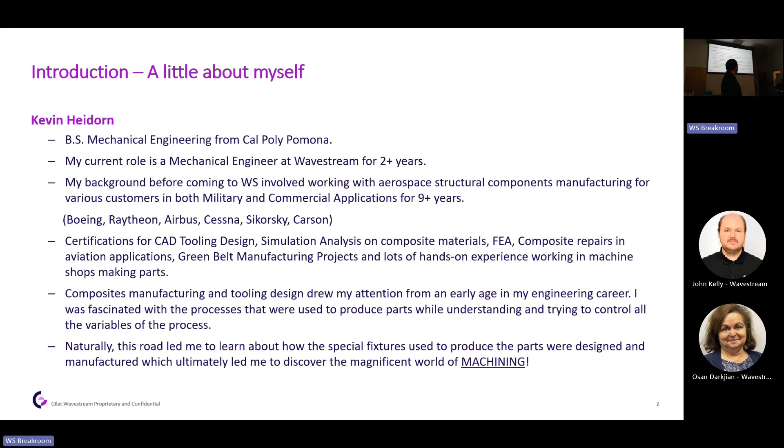So the agenda today - first off, I just want to cover some basic history and overview of how machining and things like this came to be, right? How did we get to this world we live in that is possible because of machining? So we'll go into some of that. We're going to talk about the different types of materials. I think having a basis for material science is really, really important in machining - it's really the alphabet. You need to know what materials will do, what they're made of, and how they interact with each other if you're going to have any hope of carving it into a nice, beautiful shape at the end, right?

So we're going to talk a little bit about that. We have some work holding types, and we'll talk about being creative problem solvers. When it comes to this, you have to use your brain a lot. You can't just Google some of these things, because no one's ever done it before. So you're constantly trying to figure out new and better ways to do it. We'll look at some options there.

We'll talk a little bit about fundamental shop equipment and what it takes, before you can even start machining, there's a lot of decisions and early steps before you can get to the fun stuff. So we'll talk about the tools used to get us there, and then we'll get into a little bit of depth on cutting tools.

Speeds and feeds is a really important topic. I know there was some interest in that, so I want to go over general guidelines on how to run machining. Then we're going to talk about manual versus automated machining, because they're two different branches entirely. And hopefully if we have time at the end, I want to get into some basic CNC programming for you guys, so you have an understanding of how it works, and maybe we can even do an example problem.

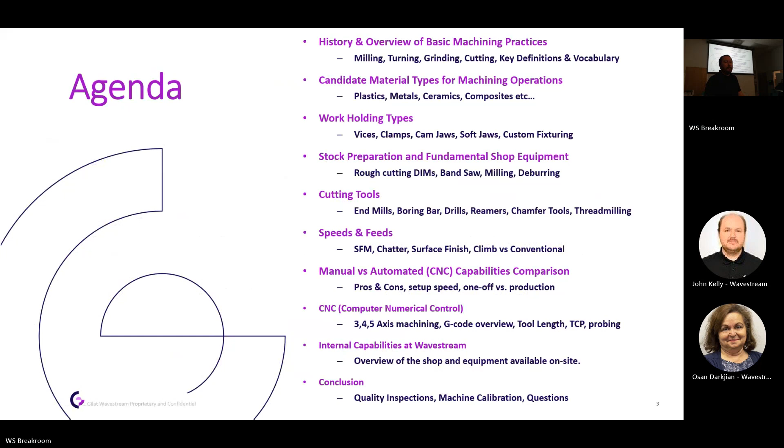So that's in there, and there's quite a lot of topics here. To finish it up, if we have time, I'll go through what our internal capabilities are here with our shop, so you can expect what to do if we need to do a job in-house. Then we'll have time for questions at the end, hopefully. So let's get started, definitely got a lot to cover today. Feel free to stop me along the way, but I'm just going to get going.

So, history of machining, right? If you think about this, we go all the way back to when we were in the caves. The cavemen were making rocks and arrows and things like that out of what they had laying around. Ultimately that really is machining. If you go back far enough, we're trying to use a tool to form something into a useful shape. There's actually been evidence of even other species, not even humans, that use tools. So this has been around for a long time.

I didn't really want to go into everything between 10,000 BC and the last 60 years, so I'm just going to jump ahead a little bit. There were some really important things that happened around 1870, when a lot of this stuff started happening - we'll talk about that later. If you look through this slide, what you'll see here is this is actually a turret lathe. These are some really old early machines, and a lot of this came about if you look at this time frame - we're in World War II right there.

War is always driven like big production on a big scale, and it's driven a lot of innovation. It's a sad and unfortunate thing that we have to deal with, but at the end, these are some positive outcomes from it.

If you zoom ahead here to the 1970s, this machine reminded me a lot of one that we actually had at our last company. It was called Big Blue, and we still used it in some production processes. It actually ran on something called ticker tape, which you'll see right here, which basically just has a bunch of holes in it.

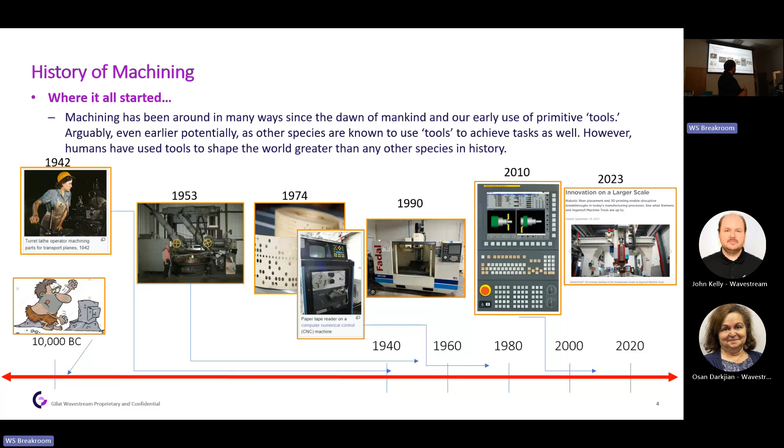I mean, they can be bigger than this whole room, all the way to the wall with the offices in the back. And they'll have a big gantry that will move. The amount of mass and precision that's moving on this stuff is just unbelievable. So hopefully we'll get into some of that.

So just to get started here, really, there's three things. I was trying to break this down. What are the three most important things when you're thinking about machining? For me, it really breaks down to hardness, heat management, and rigidity. These are the three biggest variables. Everything else matters, but if you're not able to work with these, you're not going to have anything that works in your process at the end.

So generally, going over hardness, I think I'm going to spend a little bit of time talking about hardness because it's such an important aspect. Everybody's familiar with hardness, they all hear this word, and I think you kind of have an intuitive sense for it as a kid. Even just like, oh, my nail can scratch this, or that scratched me, that hurt, right? So you get this idea pretty early on about hardness.

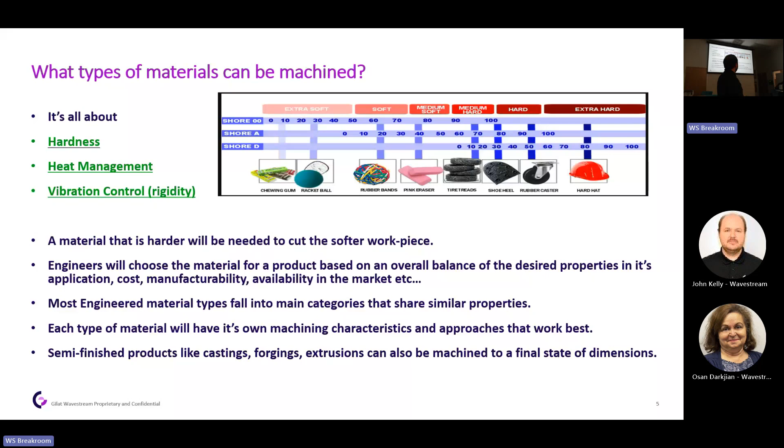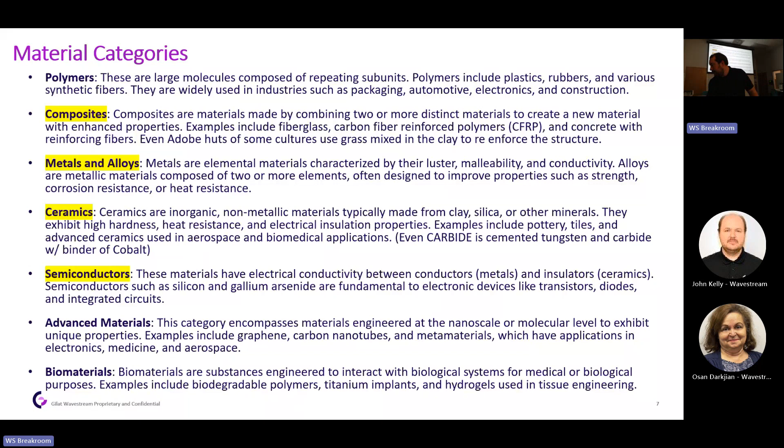You'll hear these words like Inconel, Hastelloy, Waspaloy, Nitronic—a really popular one—and, of course, titanium 6Al4V, which we actually have some pieces of here today. So this is a piece of titanium 6Al4V, and I'll go ahead and pass this around.

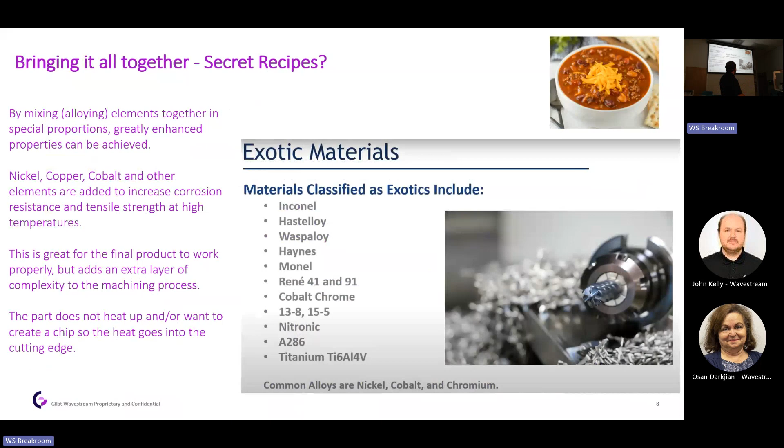Next, it's a machine part, and the machining that goes into something like that is definitely a bit different than what you would do with just standard aluminum. Really the reasoning is these materials do not like to hold any kind of heat—they're very heat resistant, so we use them in high temperature applications, for example inside of a jet turbine. These blades here are actually these really exotic materials, and they're actually a single crystal that's grown, because we can't afford to have any cracks between the crystal. Otherwise you'll have a fatigue failure, and then that turbine blade can shoot out.

And sometimes this happens, you'll hear about it in the news, sometimes they'll just shoot out or get a chip. These pieces generally have to be machined, but there's some really tricky operations that go into that. I'm kind of jumping ahead, I think I'll come back to these slides later if we have more questions, because this is the high end of machining. I just want to show you guys what's possible, and then we're going to go back to the basic stuff and how do we get here.

So let's move forward. We talked a little bit about hardness, and I also want to talk about this word called toughness. Both of these are really important to understand. Everybody generally has an intuitive feel for hardness, but toughness is a little different. Toughness is generally how well a material can absorb energy, that's probably the best way to put it. If you think about dropping a piece of aluminum on the ground, it may kind of bend, the surface will deform, but generally it's going to take all that energy pretty well. It's going to spring back.

When you have a material that's really, really hard, it's very brittle and basically not very tough. If we could have a perfect material, it would be diamond hard and super tough, and it would give you a lot of flexibility to push on it hard without snapping it, without creating these ultimate failures. Unfortunately, we haven't discovered that secret recipe yet, but we've got some really good mixes that get us pretty close and balance these properties out.

When you're comparing these things, they are different, but they're somewhat related, so just keep that in mind. Probably the easiest way to remember this is carbide is going to be really, really hard, but very brittle. And something like high-speed steel, HSS, it's not going to be as hard as carbide, which we saw on that Mohs scale, but it will absorb a lot more impact. So you can actually be a little bit tougher on those cutting tools, and they're not going to just explode in your face. They're going to take it, they're going to bend and give a little bit more.

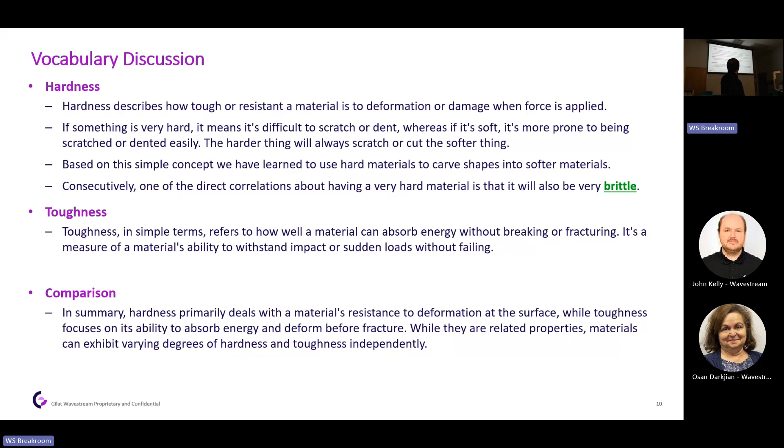Hopefully that gives you a little bit of understanding there of when we're talking about those words. So some additional vocabulary: MRR, this is a short acronym for material removal rate. It basically has to do with, if you have a cutting edge, how much volume you're removing and how fast you're removing it. It's kind of like guys talk about their cars, like I got 700 horsepower in my Hellcat, right, that's a bragging thing.

You have MRR, if you can get a big MRR rate out of a machine, that takes horsepower actually at the spindle, but it also takes this combination of axial depth of cut, which is how deep you're cutting, and your radial depth of cut, which is over from the center line. You can even take a full radial depth of cut and a full axial depth of cut at full horsepower spindle, and that's how you would calculate that MRR. I know there's going to be some math here, so if you're not comfortable with that, just come to me later, and hopefully we can get a good intuitive base for you. I will get into some more math later on, so don't be afraid, it's all good, it's all important.

Surface feet per minute, this is SFM, you'll see this a lot as well. This is very important in terms of how to derive a speed, an RPM on these cutters. How fast you're spinning it is directly related, and you'll see that in RPM, which is revs per minute. Everybody sees RPM on their car, so again, how fast is that engine turning? That's going to be a really critical parameter that we're interested in.

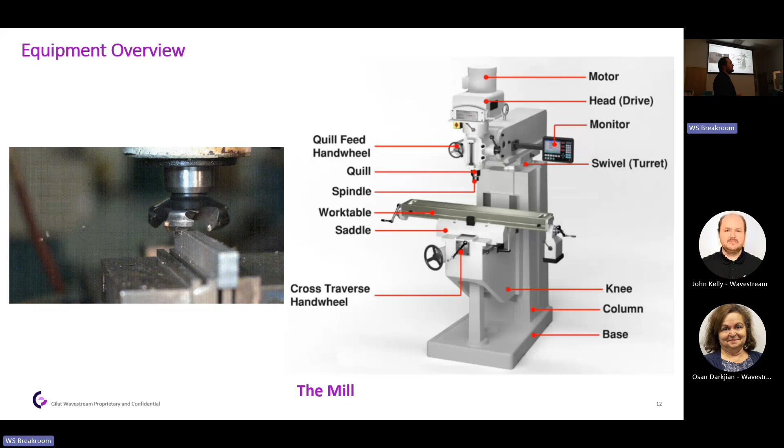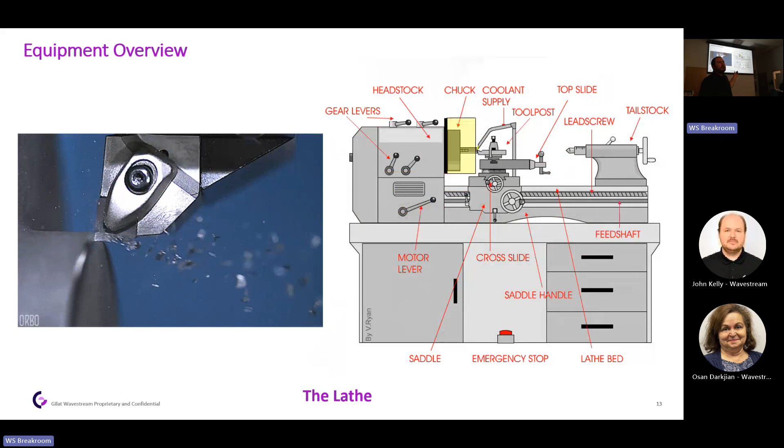And so all these pieces here are how you would adjust this. Again, you have this piece here, which will actually slide back and forth on a lead screw. And then these handles here adjust your gear ratio. There's actually a huge transmission in this thing with a bunch of really intermeshing gears. And you can actually adjust the speed of what this thing is turning at by playing with A, B, C, and 1, 2, 3 on these levers. We're going to talk more about why we do that, but ultimately, it's to set the RPM at what we want for that given material.

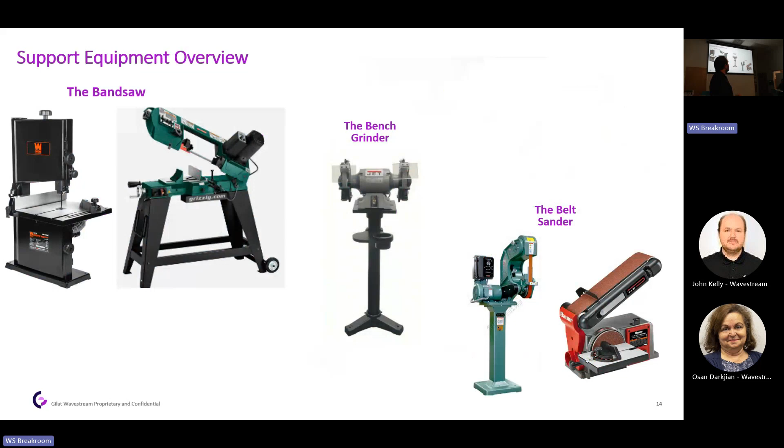So we have a really sharp band here, and what we'll do is feed a material into it. This one actually is hydraulically operated, so it'll come down and you can set how fast it drops down, so you don't have to worry about pushing the material through. You just basically set it on there, and it'll slowly drop on its own, which is really nice. Then up here we have the bench grinder, which has some cutting wheels, usually made of some type of stone. And then over here we have the belt sander. All three of these are really important in prepping that stock before we can really get started in machining.

So I figured that was helpful to put in there. And really, the bandsaw is made for just making that first cut.

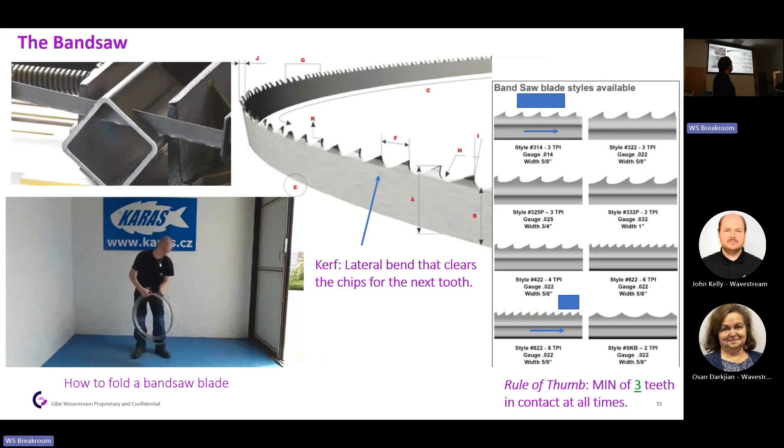Generally the rule of thumb is you always want to have 3 teeth in contact with the material at any time, just to spread the cutting forces out evenly. If you try to cut a small piece with a blade meant for bigger material, you're going to end up breaking the teeth off, because one tooth has to do all the cutting as it goes through, and then the next one has to do all the cutting, and it's not sharing. What we really want is at least 3 teeth in contact as it's pulling through the material. So keep that in mind if you're ever using a bandsaw and wondering if it's the right blade. That's a good rule of thumb.

You can also do this with titanium, which I've done, and the sparks actually come off white. It's very cool, kind of like if you go to the golf range at night and someone's got a titanium driver and they hit the ball, you'll see a little white spark shoot off. If you guys want to see some sparks, we have that piece of titanium floating around, we can grind it later.

Magnesium is a bad idea too, don't do that, because you get that auto-ignition temperature and it turns into like a 5,000-degree meltdown and you burn a hole in the earth. So don't do that.

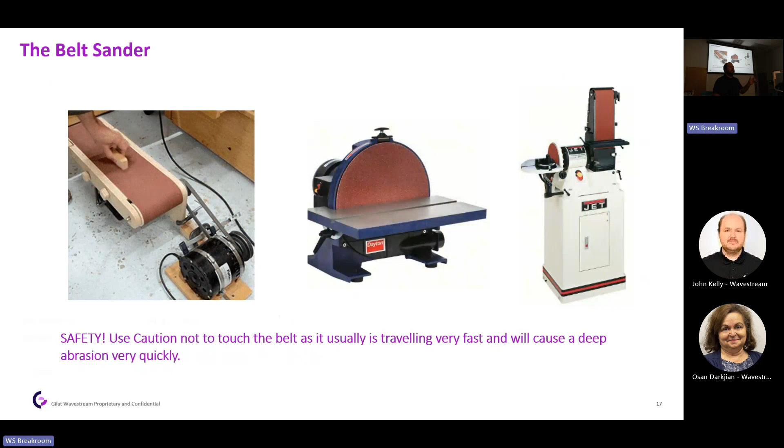Once it's ready, it's going to drop into a fixture. This is probably one of the more important things to really understand, if you take anything from today. It's not tricky.

It's just something that'll change the way you think about the world, I think. At least it did for me.

We all know we live in a world with 6 degrees of freedom. We can walk forward, back, left, right, or jump up and down, but any movement has to be some translational movement in X, Y, and Z, and you can also rotate about X, Y, and Z. So you have 3 translations and 3 rotations, which gives you 6 degrees of freedom. Anytime we're locking a part into a fixture, we want to control all 6 degrees of freedom.

The easy way to think about it: say I've got this part I want to lock down. If I take 3 points anywhere on it, I can create a plane, and that locks down 3 or 4 of the degrees of freedom right off the bat. But we'll still be able to rotate and translate on a couple. So by adding in 2 pins here, you can stop that movement and stop the rotation. Then the last thing you have to do is move it up to 1 more point.

Now if this part is in contact with 3 points to make a plane, 2 points for a pin, and 1 point there for the point, you're actually going to lock down all 6 degrees of freedom, and then you're going to be able to machine it.

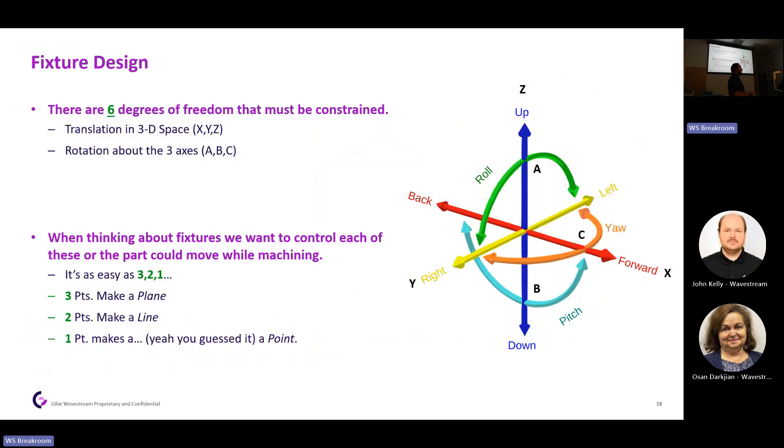Yeah, go ahead, you have a question? Can you machine without locking all 6 degrees of freedom?

You can, but it's probably going to move on you, so it's a risk. In some cases, like on a lathe, we're not quite locking down that rotational degree because we have to turn the part, but in the chuck, yeah, it's locked in there. So it's kind of relative between the workpiece and the holder it's in - that's where those 6 degrees start to apply. But again, here you have a plane, we're creating a line across here with 2 points of contact, and then we have this last point of contact. That'll keep your part nice and fixed.

These are some overall calculations, and I'm not going to go through all the detail, but just to give you a rough idea: if you're using a 3 horsepower spindle, which is very common with a Bridgeport machine, and about 75% efficiency because you'll have some loss through the transmission and belts, then there's a conversion factor here and this is our surface feet per minute.

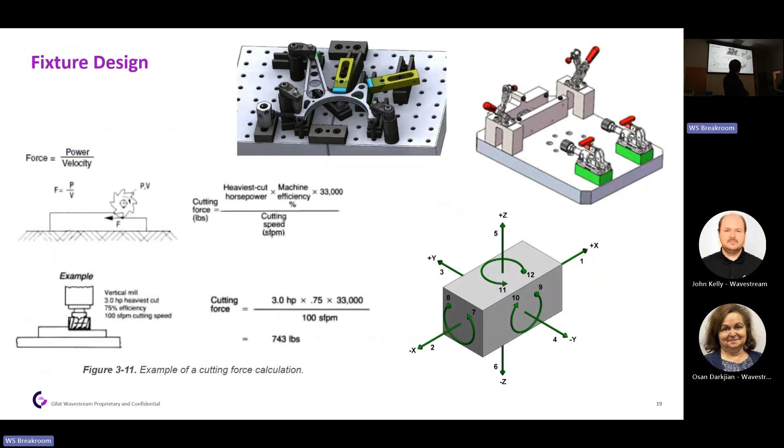It ends up working out to about 740 pounds that we need to react out of holding onto this part. So it can be a lot of force - more than you would think. I mean, 740 pounds just to hold onto a little thing that you're taking a cut with. So just to give you an idea of where that's at.

So these are some fixtures here - hold on tight, we get into work holding. This is actually one of my old SolidWorks fixtures. I designed this part back when I got out of college, doing some mountain bike parts, so I had to put the picture in there. We have a chuck, which is made for holding onto round stock.

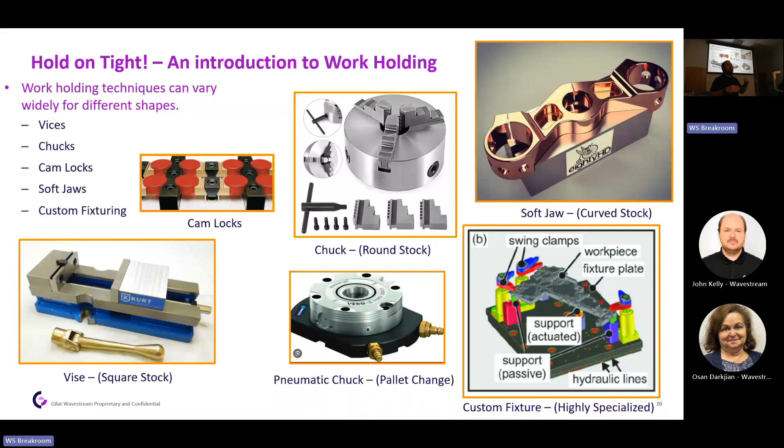Really the most popular one here is going to be your vise. You're going to take a block and fix it in there, and you'll use parallels to set it up and make sure it's nice and tight and level. And the fancy stuff gets into these pneumatic chucks and custom fixtures, which will have hydraulic pieces that'll move out of the way of the cutter as it's coming through.

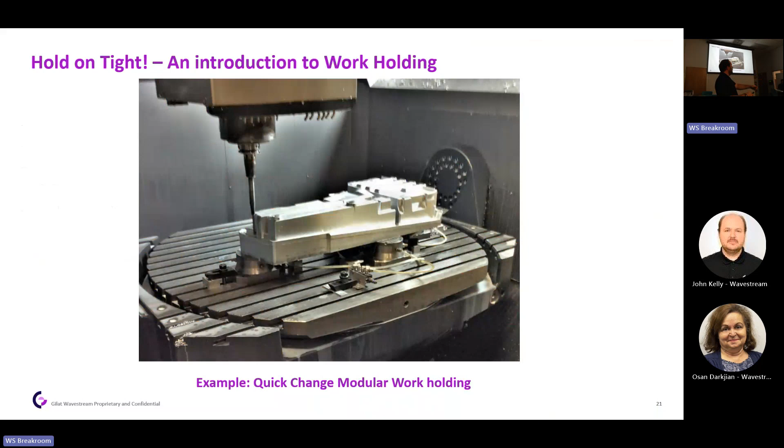So again, here's a picture of that. This piece is actually made to come right off of these pneumatic chucks. This is a quick change pallet system. So if you're doing a bunch of these parts, you can put some holes in the bottom, drop it in, machine it, and pull it right back out. So, some faster ways to do the same thing.

Let's talk a little bit about tool holding. So tool holding is stuff like this right here. This is a Cat 40 tool holder, and I'm going to go ahead and pass this around again. The drill's a little sharp, but if you hold it by this end, it's a nice end, so it's not gonna hurt you. But yeah, it's got a little weight to it. Feel free if you guys want to check it out.

This is all about tapers, right? So we have a spindle taper that is going to pull that tool holder up inside of it. And each one of these you'll see has a slight taper to it somewhere.

We also have the R8 collet. This is what we use in our shop here. It's really popular in a lot of manual milling machines, and again, that taper is right here. This has a drawbar that'll come down, feed, and pull this whole piece up into a taper. And then while it does that, it squeezes down and grips onto the end mill, or the drill, or whatever we're going to be cutting. So you guys check that out.

And then the HSK tapers, those are generally used in really high speed routing machines. You'll see those more common in composites, and really probably across the street they might even have some of that stuff, where they're doing wood and that kind of material.

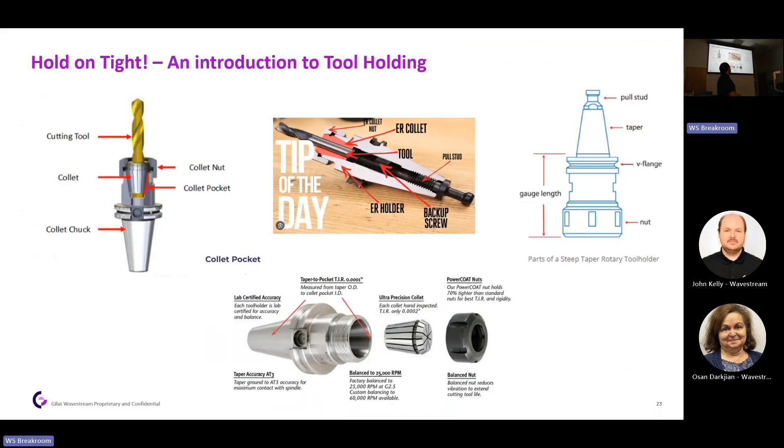So again, this is what they look like inside. You're going to have really three pieces. You have your tool holder itself, which has the taper. We have the collet, which is a really precise piece, and I have one of these that I'll definitely pass around. So this is the collet, and the actual drill or end mill will go in here. This is basically just a big spring, and again, it'll squeeze down as we tighten it up. This is a beautiful part. Look at it as you're holding it and figure out how do you make something like that. It's just one small piece of kind of getting this whole machining thing to work. We have to have these little tools to get to the end, right? And then this is just a nut that goes on and holds everything together.

So any questions so far? Are we still hanging in? Cool. Yeah. Yes, exactly. Yeah, a Dremel tool also has a collet at the end of it.

So I did a little bit of research and I actually learned some new stuff preparing for this. I thought I'd share because the statistics were pretty wild. If you look at something like, say we're holding these tools in the spindle, you see that drill over there. If that drill is not exactly concentric to the center line of the spindle - it's probably more common with an end mill - just imagine for a second that you don't have it exactly on center. And little secret, you never have it exactly on center. There's always going to be some amount of run out. It only takes a very small amount of run out to actually create a huge amount of tool wear. I mean, we're talking 1/10,000th of an inch can drop 10% of your tool life, which is pretty wild.

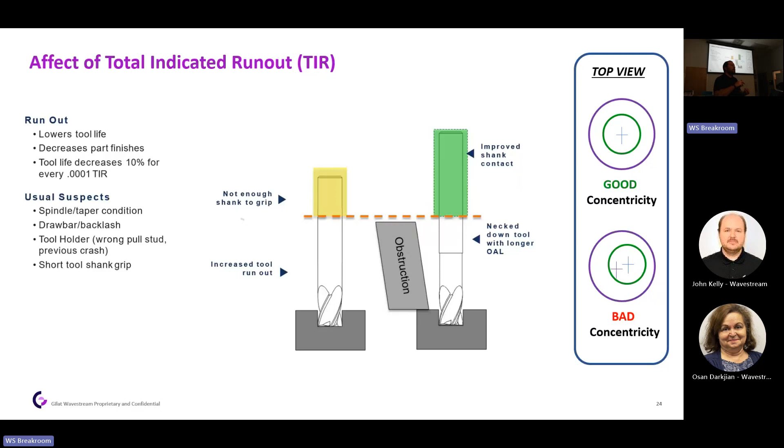So again, this is a top view of what that concentricity would look like. This is your cutter not on position, right? So this would be bad. So what we're looking for in these tool holders is we really want to maintain that concentricity. That's really, really important.

And then, after you've locked that tool into the tool holder, that tool holder itself has to go into the spindle, and it also needs to be concentric, right? So you have a lot of things that start to add up. And again, if you're not seeing a good result or you're seeing a lot of tool wear, you might have a problem with something like this.

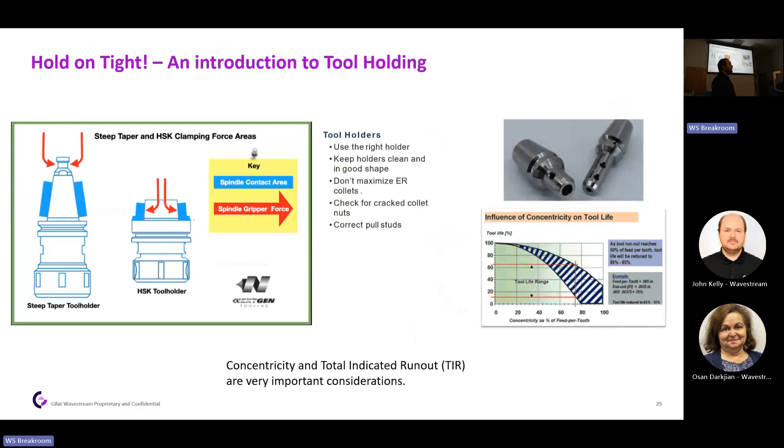So this is a nice little chart here. Check it out later. There's a lot of information in this.

So let's talk about drills. I love drills. Drills are awesome. Who doesn't like drills, right? Let's make some holes. It's the best.

Everybody's probably got one of these. Maybe you got one of these in your garage. This is a drill press. This is just a handheld drill. Again, this is using a drill in a lathe. So we're turning the workpiece, and the drill actually stays still this time, which is kind of cool. And then this would be in that drill press, where the drill's going to spin.

Drills are easily the fastest way to just remove material. We go back to that MRR, right? We want a material removal rate. If you want to get rid of stuff and delete it, drill it. Just drill it out, drill a bunch of holes in it, and it's gone faster than any other way. So they're a really useful tool in the shop.

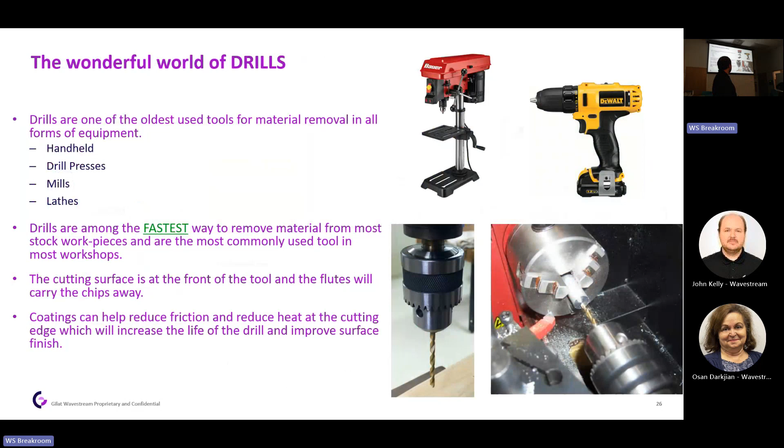And generally, the cutting surface is only going to be on that very, very front tip. It's called the chisel edge. And I got some pictures of that. Also, coatings can help reduce the wear on the tools.

So the first twist drill was patented by this guy named Stephen Morse. He actually also has a taper named after him, the Morse taper. He's a pretty important guy. This was back in 1863, and he went ahead and came up with this idea: hey, if we start cutting our metal out this way and drilling holes, that's pretty cool. We can drill holes in anything.

As time moved forward, the first thing we really started playing around with was higher carbon steels. We started learning about the Bessemer process and a lot of these iron-carbon phase diagrams, and engineers are starting to figure out this stuff that blacksmiths have known since the 1500s. So we start adding more carbon, they get harder and harder. Then we start adding cobalt, they get even harder. And then we discover carbides and solid carbides. And nowadays we've got these beautiful carbide tools that are coated.

The coatings can be anywhere from like a black oxide. This titanium nitride is really popular, you'll see that gold color. That actually reduces the friction while it's cutting, and also reduces heat in the tool to keep that drill lasting a bit longer. Then you have diamond, which is very, very expensive. Everybody knows diamonds are expensive, it's no different in the tooling world. These are generally lab-created diamonds, but they still cost a lot of money.

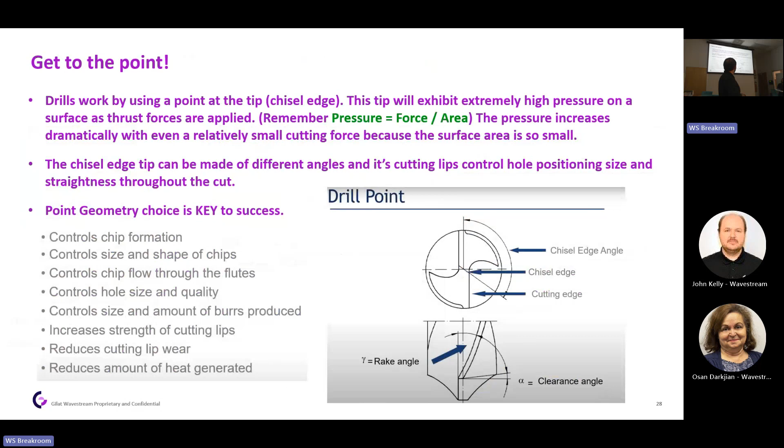So again, the chip formation is really important, and these all kind of add up to get you a good drill. But one thing that I actually kind of rediscovered was how important the difference is between a standard point and a split point drill. And they look about the same, right? But what's really interesting is this one is actually far inferior.

So this split point is way, way, way better. By using a split point drill, just with that small geometry change, you can actually reduce the cutting force by about 40%, which is really awesome. It's easier on everything, it's easier on the machine, it's going to be faster, and you can kind of go through.

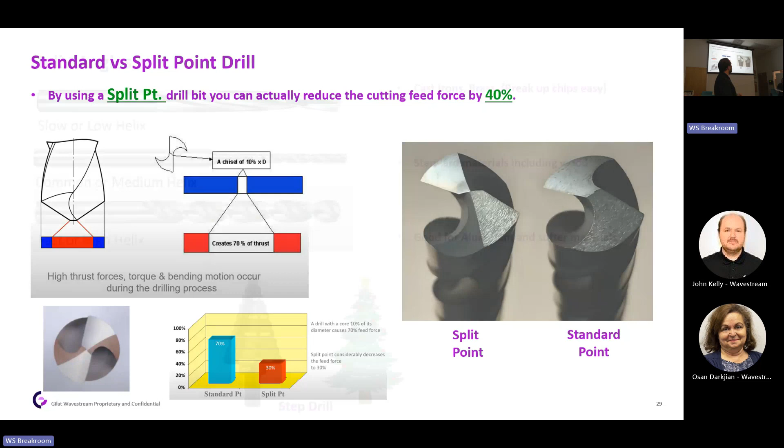So again, just that small geometry change there makes a huge difference in the way the drill functions. These are some other drills. These are showing the helix angles, and you'll see different rates here.

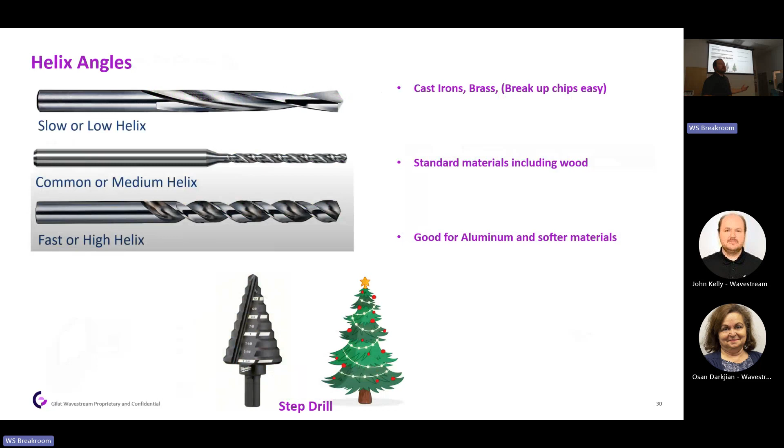I also have some of these that I'll pass around. And then this is a step drill. This is a really nice piece to have in the toolbox. It's like 10 drills in one. If you want to drill a bigger hole, you just keep pushing up a little bigger, keep pushing through. It always reminds me of a Christmas tree, so I just put that in there too. But basically you start small and work your way up, and then you don't have to keep a bunch of drills - you just have the one step drill. So it's good to have for field repairs, things like that.

To peck or not to peck - this is a question that everybody loves to fight about. Pecking is, when you start diving into a material, do you want to pull it back out and clear the chips out and then come back in, or do you want to just go through all the way? Depending on your style, generally pecking is not really the right way to do it.

That's if you have a hole that's about 5D deep, so 5D is 5 diameter. So whatever diameter hole you're cutting, if the depth of it is less than 5 times that, then you probably don't want to be pecking, because the drill has to keep entering the material, and it starts to wear out the drill bit. Now you've got 5 or 6 pecks on one hole, versus just that first one when it goes right through.

And so that's something to keep in mind. But once you start getting really, really deep in there, and you have a really deep hole, you've got to start pulling those chips out, so then you can start doing those retractions. That's just something to keep in mind there, Woody Woodpecker.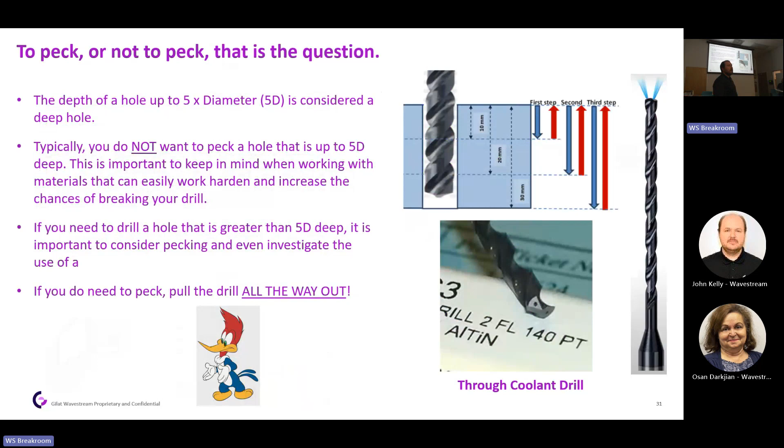And then sometimes you'll actually see these drills with through coolants. The spindle will actually allow coolant to flow through, and it'll come out here and help push the chips back out. So I have one of those - I'll pass that around as well.

Spot drilling. So this is kind of the right way to drill a hole if you want it to be accurate - you can do a spot drill first. And there's definitely a right and a wrong way to do a spot drill. The biggest thing is you don't want these edges of the drill to contact and catch first. So this is improper, right? We have too much spot angle on this.

What you want to hit is actually the center point, right? This is where all the cutting's happening. And so if this happens first, you have that come into the material - it'll actually help center up the hole, and then it'll give the tool something to really grab into. So that's just something to keep in mind there if you ever have to use a spot drill.

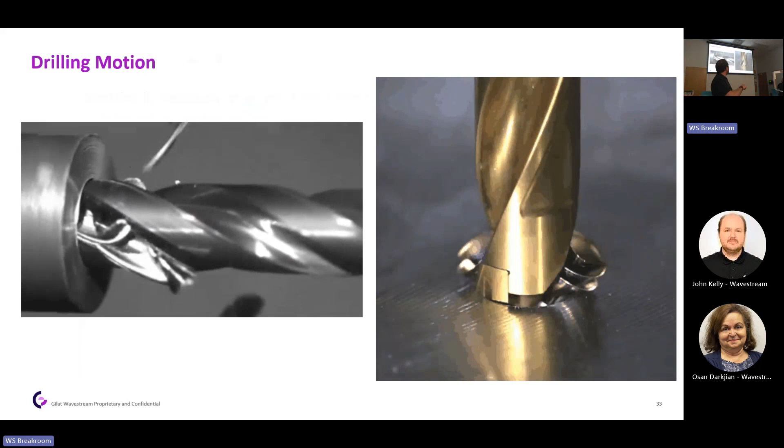Yes, we have a question - do they, does center punching work as a good tool? Like, to punch it first, it's very effective - it's kind of like a cheap spot, right? They actually sell a drill that's a spot drill and has that angle in it, but if you don't have one and you just want to punch it, yeah, definitely - because you want that center to have something to set up into. As long as the edges of the drill don't catch first, that's the biggest thing, so just keep that in mind.

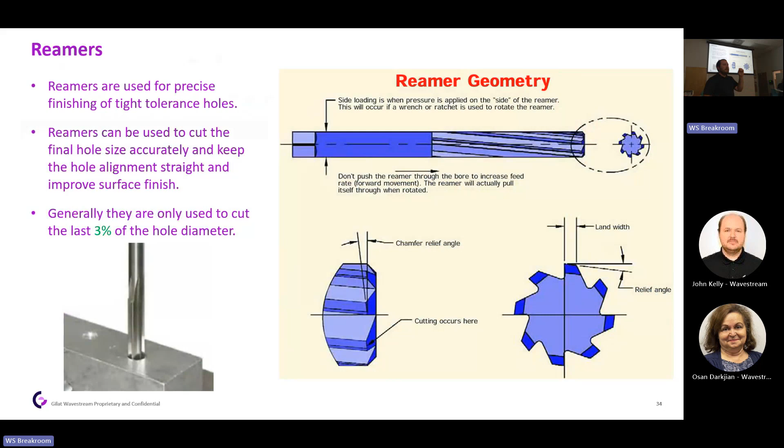Don't punch it too deep. But yeah, reamers themselves, they're really good at finishing - getting the hole the right size and keeping it straight. So I have some reamers as well. And these are all the different shapes - these are end mills.

So let's get out of drills for a little bit. We'll move into end mills. End mills are kind of similar, except instead of cutting on the face, they cut on the end, right? They cut on the side. That's why they call them end mills. And you can have a ton of different shapes with this. You'll see the coatings and those carbide materials, all that stuff still applies, but now we're in the end mill world.

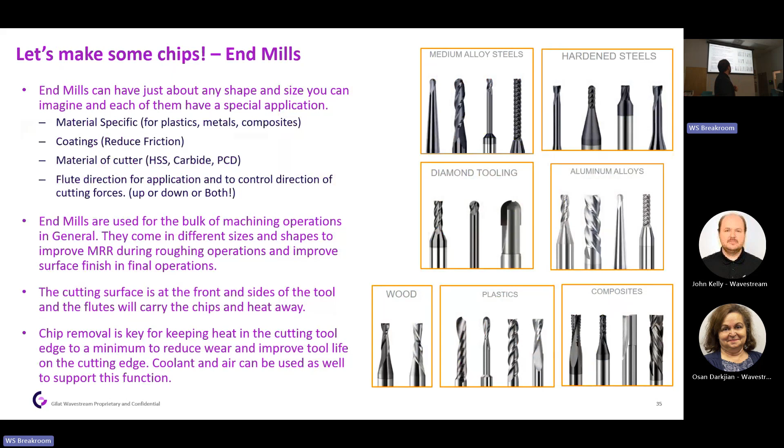What you'll really see is, like, aluminum stuff you're going to see usually has less chip, or less flutes. That's the number of these spirals that go up the side, and that's to get more chip clearance. If you're cutting wood, these are kind of interesting. Plastics actually just have one flute, which is kind of a weird shape right here, but it's just to get that chip clearance maximized. And wood actually has the flutes reversed. They're going the other direction, and they're meant to push the chips down rather than pull them out. So all of this has its own place and purpose.

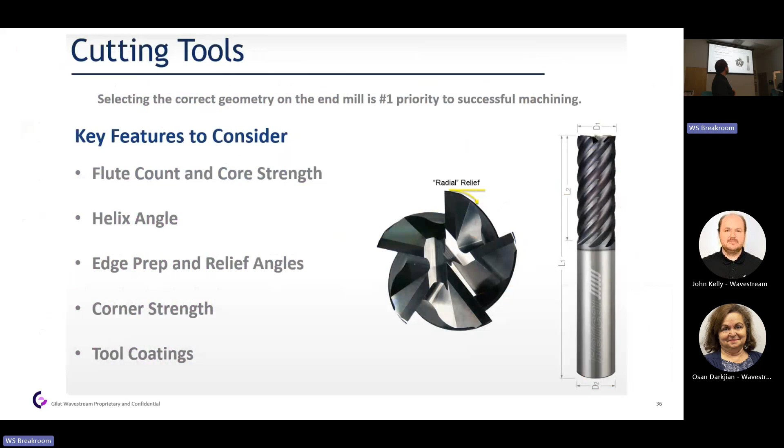But again, key things to keep in mind are just the helix angle and how much core is in the chip here and how much relief. So again, helix angle, probably going to jump over a little bit of this stuff, but come back and check it out.

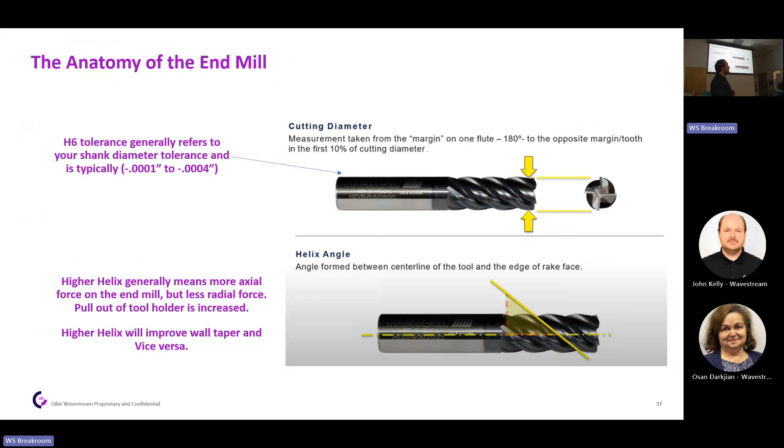Something to keep in mind: more flutes generally is for the exotic materials. Steels are usually going to be around, you want to use like 4 or 5 flutes for that, because you need a nice core in the middle to be pretty strong, but you also need good chip clearance. Aluminum, again, less flutes the better—usually 2 or 3 is great for aluminum. That's going to get the chips out. And when we talk about the core, it's just that piece in the middle that's not carved out. It's not missing any material. It's solid, right? So these are your flutes here, and these will pull the material right out.

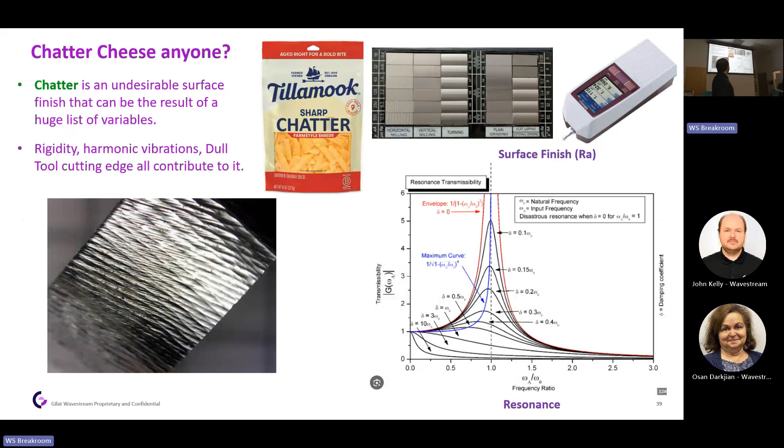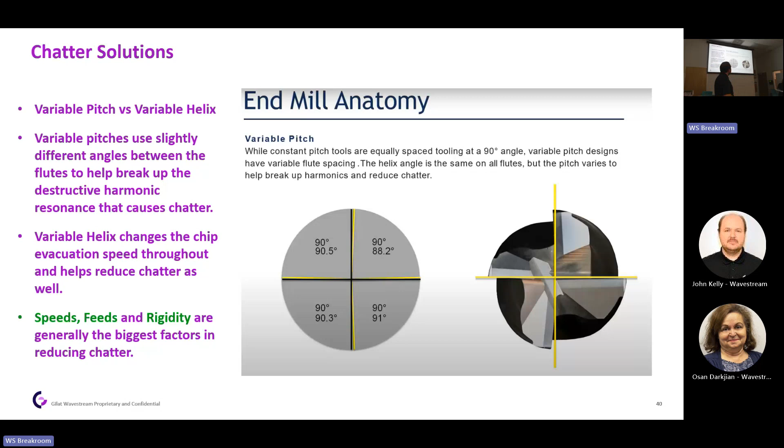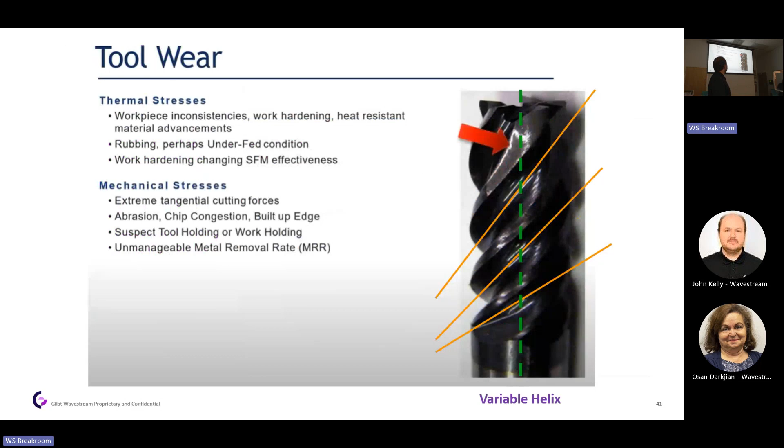Again, you can also change the helix angle as you go up. They can start out really aggressive, and then as it goes up, it can change. That'll actually help with the extraction of the chips as they come out, and that plays with the chatter too. So all of these are little variables that happen to help reduce that.

If you ever find yourself cutting carbon fiber, this is a really nice tool. This is called a compression cutter. It actually has flutes going one way and then flutes going the other way, and it'll push and pull, and that'll balance out the forces so you don't get any delaminations on the part or pull up the fibers—you want a nice smooth edge at the end.

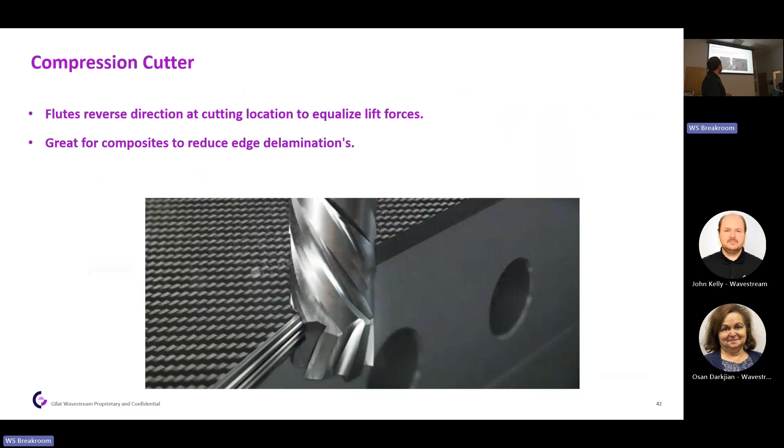Yeah, you could tape it, right? You could do a lot of stuff. We actually had a really tricky way of doing this. We would fill it up with ice or water, put it on a chuck, and freeze it. That would create ice in there, and we'd machine right through the ice, and that would hold it in place. That's kind of an interesting solution to a really tricky problem.

But we need this stuff to get on the plane and fly. They use this all over aerospace and quite a lot of other industries too. So yeah, just fill it up with ice and freeze it, and once you're done, you just let it melt. You got yourself a part.

So work holding is all about being creative, right? And really coming up with solutions.

What's the application of the honeycomb? Yeah, so they'll use this in a lot of aerospace, inside the wings and things like that. You'll actually see that carbon fiber piece that's going around, you'll see an edge of it. You can't really see it, but that is actually honeycomb in there. Great question. It's basically very rigid, so you can stand on this, and it's very lightweight. So it's really strong.

And again, it kind of comes from nature, right? Bees actually make the honeycomb naturally. I learned something recently about how they produce this. When they make it, they're not programmed to do this nice hexagonal pattern thing - they actually make it in a circle, and as it dries, it naturally hardens into a honeycomb shape, which I just learned. I thought that was fascinating, because nature really just has a way of finding the strongest shape for the weight ratio. So we're just kind of stealing that and using it where we want to, but it's pretty cool.

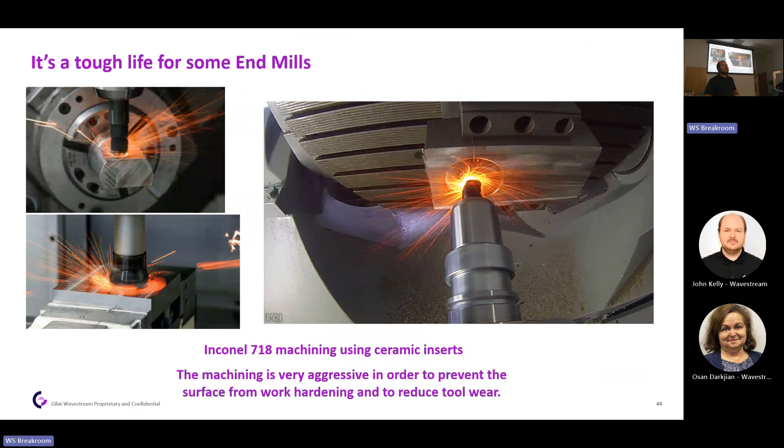And again, we use these ceramic inserts because they need to take the heat, and this piece does not take the heat - that's the point. The Inconel is really, really good at high temp resistance, so the workpiece doesn't get hot, but the ceramic inserts end up getting super hot, and you're shooting all these things around. So I thought that was kind of a fun video to share.

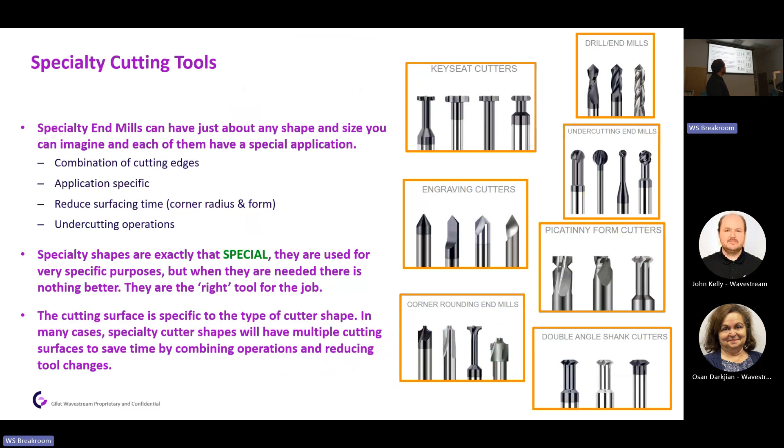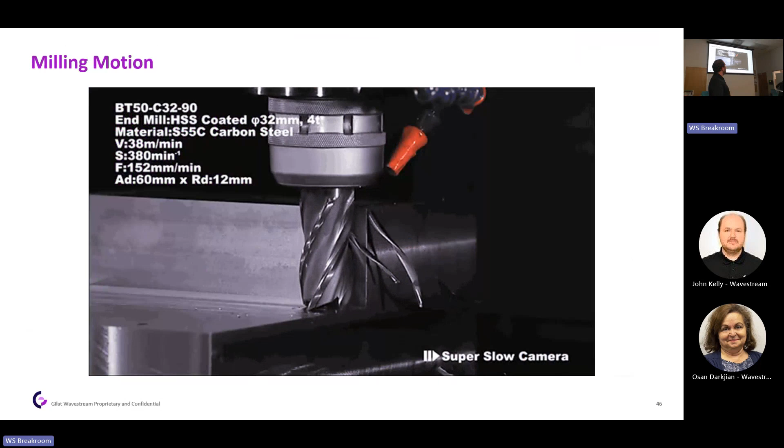You get into specialty cutting tools, so again, pretty much any shape you can imagine, you can cut it. I'm not going to spend too much time because I know we're starting to get towards the end here, but I just want to kind of jump through the slides a little bit faster than I normally would, because I like to talk and I burned the time already.

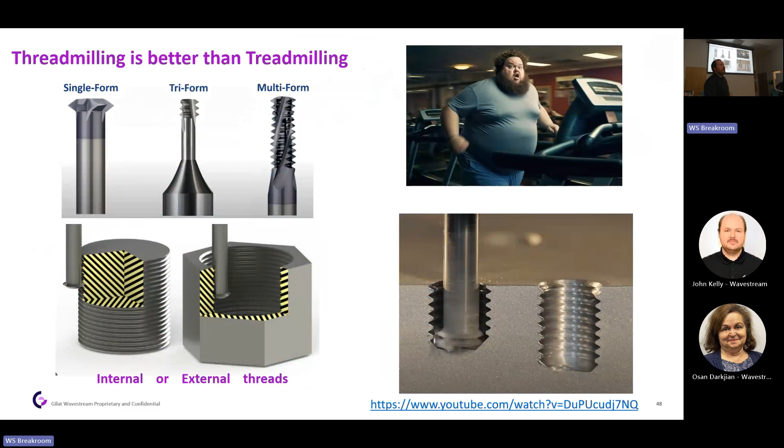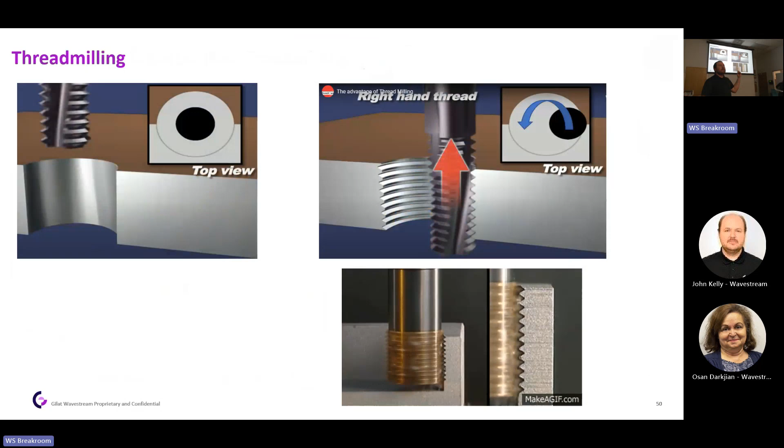Thread milling is super important - it's really important when you want to cut threads. How this works is it'll come down into the hole, slightly undersized, and actually cut the threads. That avoids breaking off taps inside of parts, which is no fun if you ever have to get a broken tap out. So how it works is it comes into the part and cuts that thread, and it can be done - you're spreading out the load all over, so all those teeth are doing the work, and you can save a lot of time.

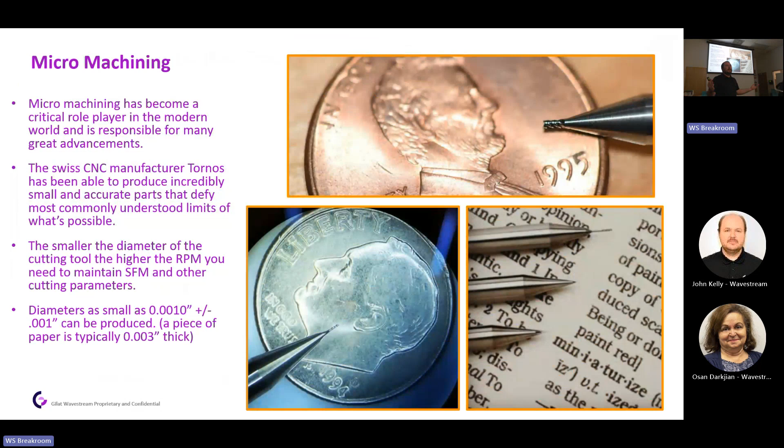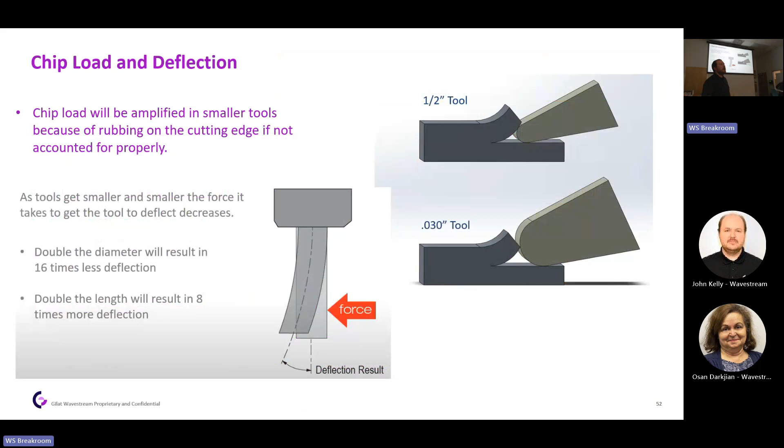Cutting forces, this is actually kind of interesting, something to keep in mind. Doubling the diameter will actually reduce the deflection by 16 times, so it's not a 1-to-1 relationship. It's a significant amount, and so when you start getting into those small tools, tool deflection is actually a huge factor as you start to cut through.

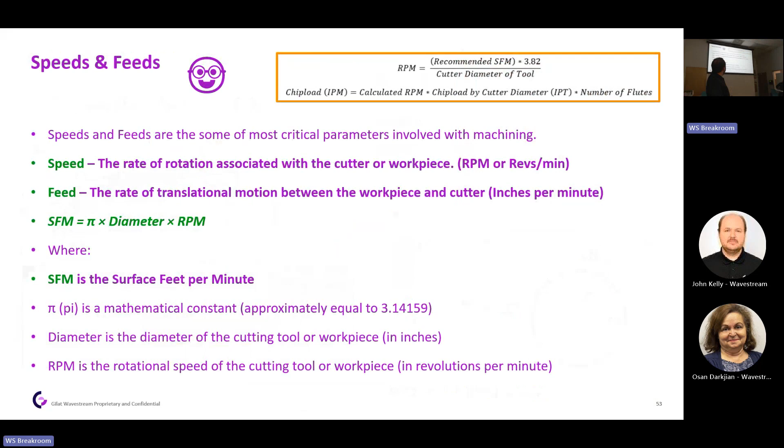Surface feet per minute, or SFM, is calculated with our diameter and RPM. A way to think about this is how fast the actual surface is moving. Say I take this piece and spin it—if I put it down, it's going to roll along a flat surface, like a car tire. That's a way to visualize surface feet per minute. It has to do with the diameter: you're spinning this up, and if you put it down like a tire, it tells you how far it's going in surface feet every minute. It's a really important parameter when we're programming, and a bit of an eye chart, but here's a way to check it out.

If we're machining aluminum, a non-ferrous material, using uncoated carbide, we can go up to 1,200 plus surface feet per minute. So you'll match up what material you're cutting with what your cutter material is, and figure out the recommended speeds—how fast can you spin that thing and have it hold up. Then when you're pushing through the material, that's how fast you're going to push through, which again involves a lot of chart work. Say you're cutting 304 stainless steel at 200 surface feet per minute, you can actually calculate how thick each chip is.

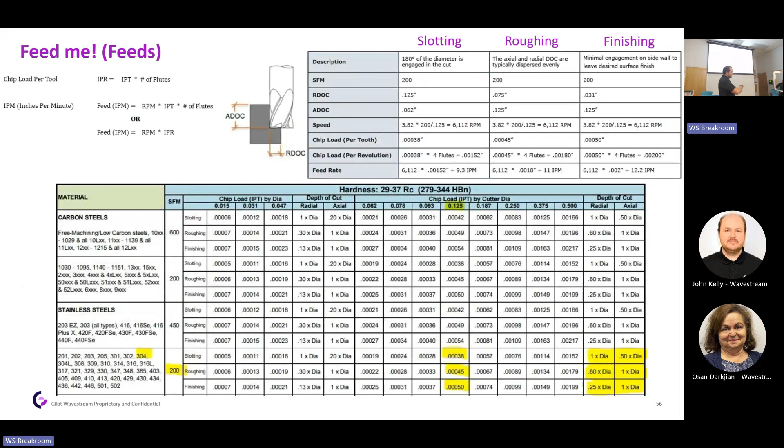Yeah, unfortunately time is going to be tough—too much to cover. It's a big world.

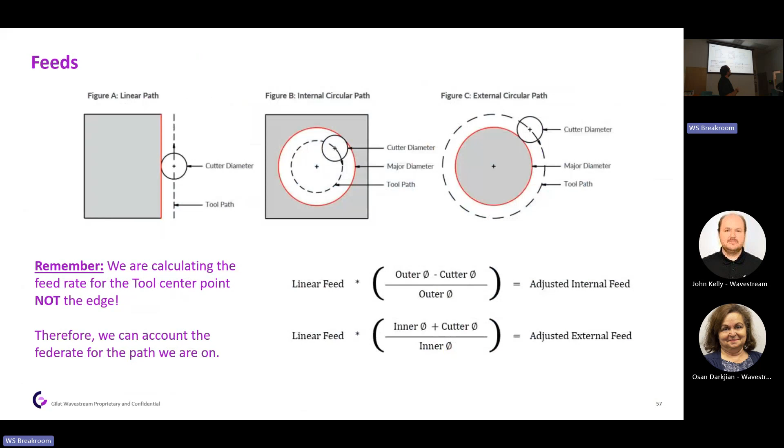Those speeds will actually change too. If you're cutting in a straight line, they're going to be just like what you would calculate. But something to keep in mind is if you start going on the inside of a pocket, you actually want to slow the feed down. There's a bit of a calculation for that compared to the outside, because again, we're controlling the center point of the tool, not the edge, so you have to account for where you're at in the pocket.

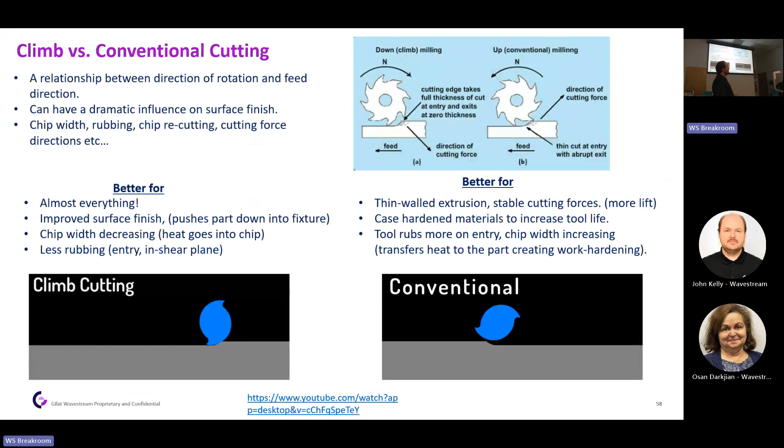This is climb cutting versus conventional cutting. Generally, you're always going to want to climb cut, unless you're dealing with some really specific case-hardened materials where you might want a conventional cut. But if you're ever questioning, start with the climb cut. The way I always think about this is the direction of rotation relative to the feed direction—it almost looks like a wheel doing a burnout in a car, and that's an easy way to remember it. It's like a burnout, but moving backwards while trying to go forward. Just imagine you're spinning and feeding in that same direction of the spin—that gives you a good climb cut, which helps a lot with your surface finishes.

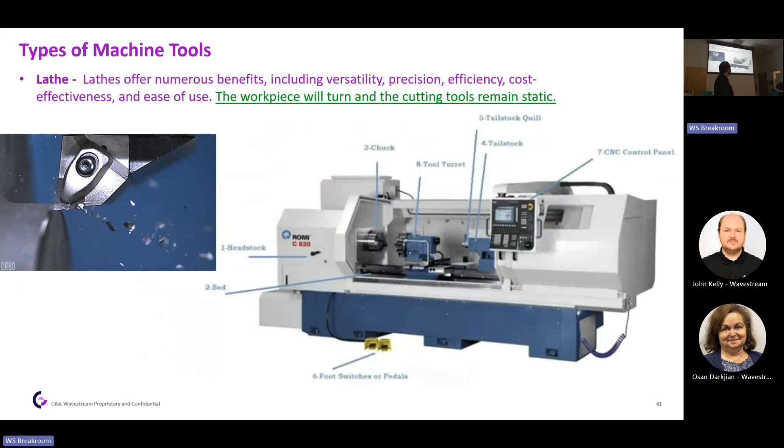So there's quite a lot of advantages to both. Manual is going to save you a lot of time on one-off prototype stuff, but the actual automated CNC part can save you a lot more in production.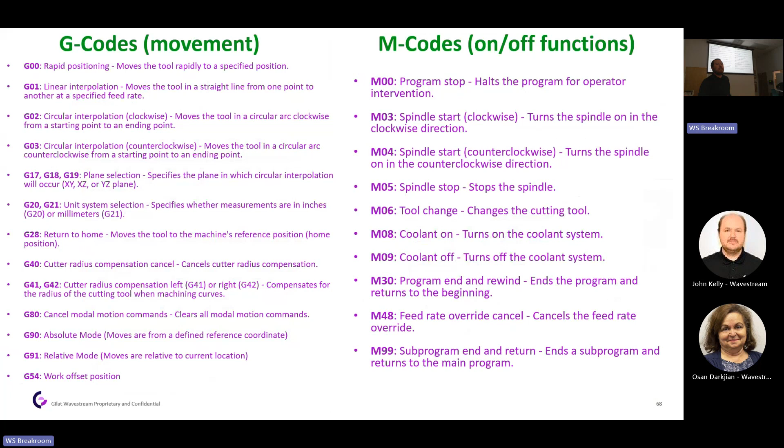We talked a little bit about how to hold those 6 degrees of freedom. We have the Cartesian coordinates here. These are your G codes and your M codes. Unfortunately we're not going to have time to do the G code programming example I had for you, but it's here if you're interested.

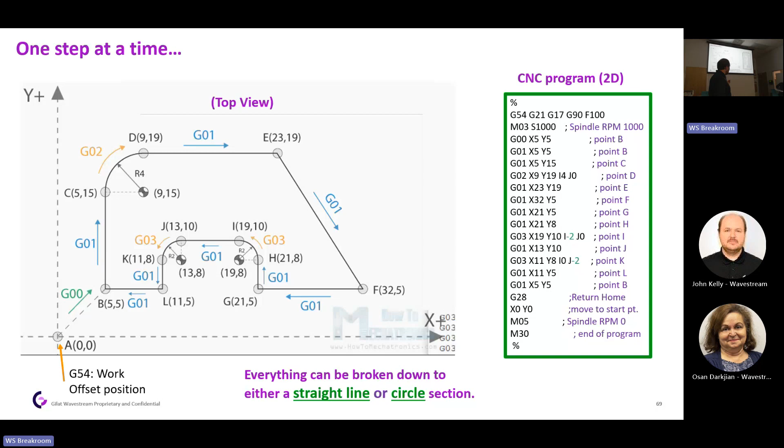You can go line by line through it. You start at a point in space and tell the machine to move up to a certain point. A G00 lines up with a rapid move that'll move you up to point B. A G01 is a linear feed move, so that moves in a straight line. A G02 is used for a circle move, and then you're back in, going line by line, tracing your steps out. So it's not as complicated as it looks. It's just one piece at a time.

Nowadays, what we do is we actually program all this with a computer. It takes a 3D model, and then we program in tool paths. Instead of doing each line one at a time by hand, like the old ticker tape stuff, which is really slow, now the computer uses algorithms to figure out the shape of the material and how to feed down into it.

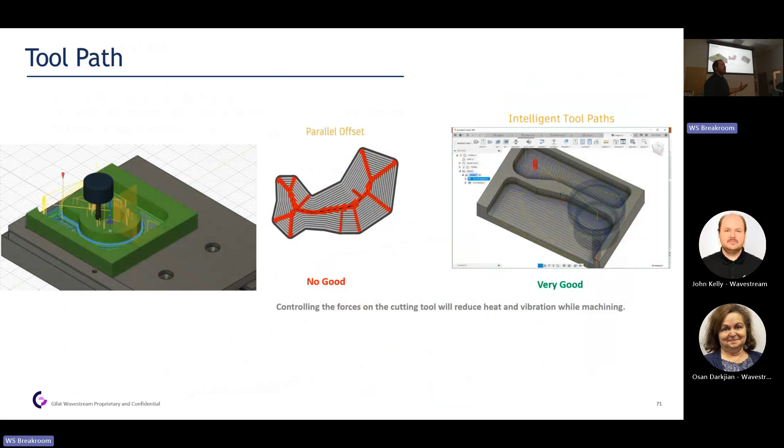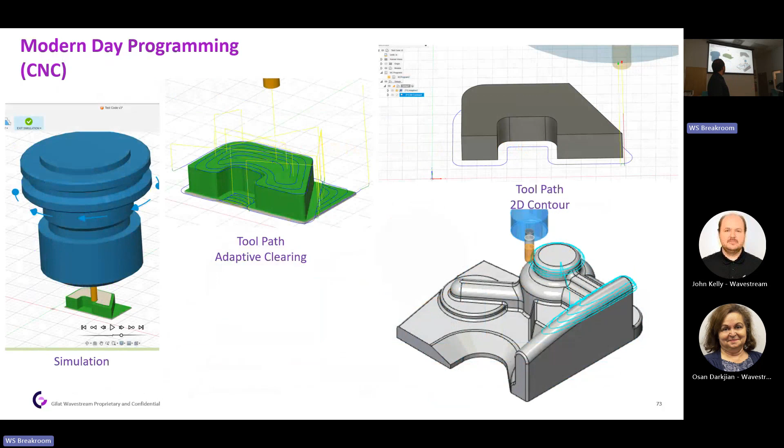Ultimately, we just adjust the parameters of our surface feet per minute, our axial and radial depths of cut, and then we go ahead and carve everything out and put it in the machine. This is in here too, and I'm happy to go through it if anyone's interested.

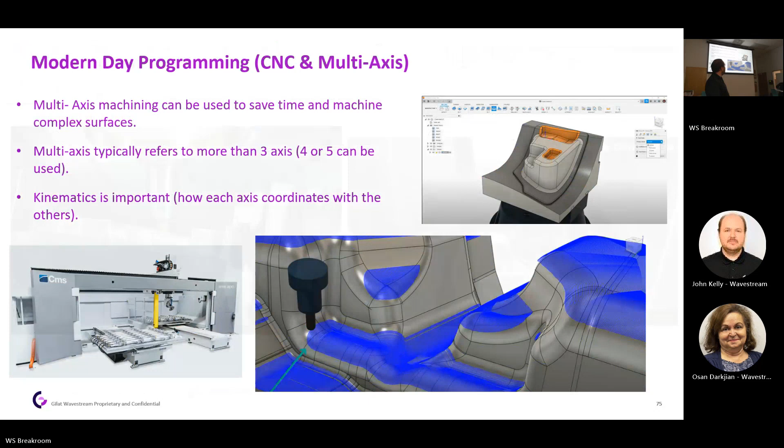There's some 5-axis machining, which doesn't only do X, Y, Z, but actually moves things off at an angle, which can be really helpful for finished contouring on parts. You'll see that right here. Some pretty unique motion, a lot going on there.

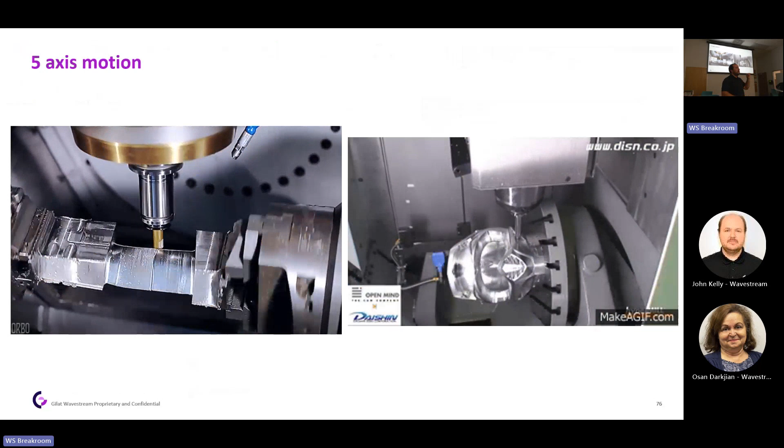Everything breaks down. Just remember this too: the 6 degrees of freedom, and everything is a straight line or a circle or some portion of a circle. That's all we're doing. We're just doing G01s for straight line moves and G02s or G03s for circular interpolation moves. You can make any shape you want because it's always some type of arc or some type of straight line. It's a really nice way to look at it.

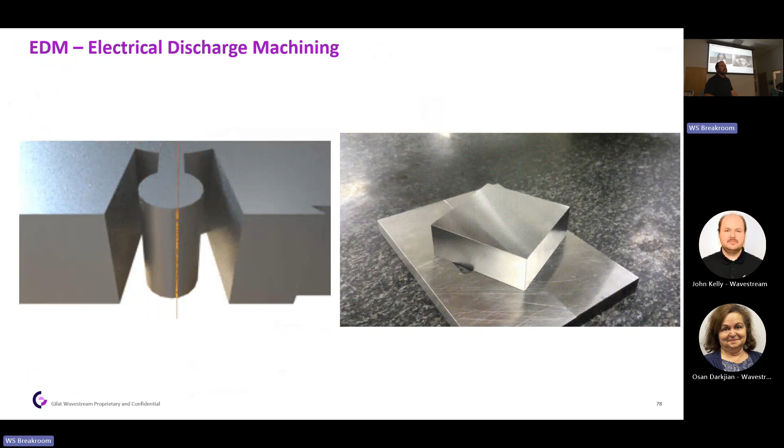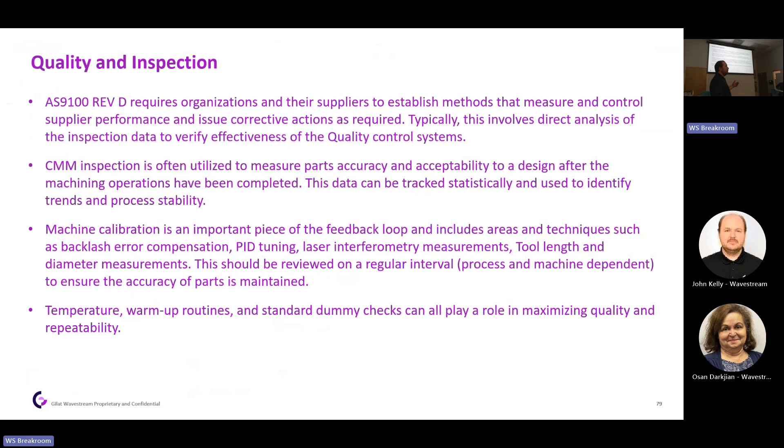Quality plays a big part too. We use AS9100 to inspect these parts and make sure we have good repeatability in our processes. Machine calibration is a whole other topic, very involved, but you basically want to make sure that when you tell the machine to move 1 inch, it's actually moving 1 inch and not just close to it. So you have things like backlash compensation, tool length, and probing that you can account for in the machine control.

Some overviews of our shop. This is the stuff that we can kind of do in our shop. We have one of these Bridgeports.

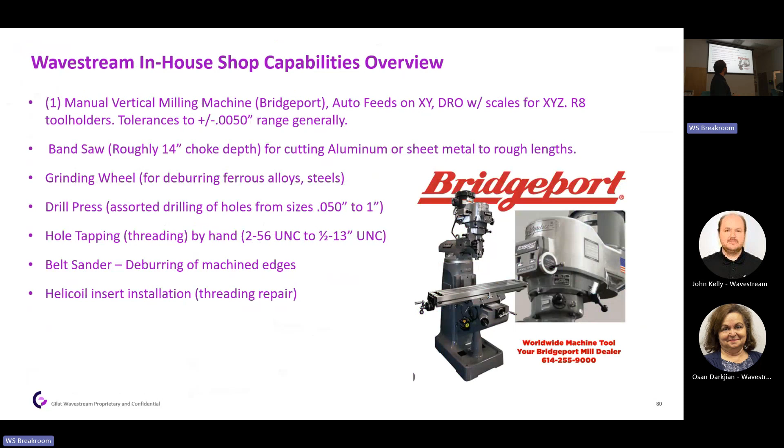It's a great machine. It has a variable speed spindle, and the table can go in X, Y, and Z, so we can move things up and down. You guys saw this kind of early on in the presentation, and again, it uses that R8 collet that made its way around. We also have drill presses, grinding wheels, and a bandsaw in there.

We can do some standard hole tapping and threaded repairs and things like that. So just to finish up here, there's always many decisions to make when you're really considering machining. You guys probably just got a small taste of it today, but you see how many variables go into it, and all this stuff is things to consider.

It really just comes down to nothing's free, right? Everything has a trade-off. If you want to go faster, maybe you need to spend a little more money. If you want more rigidity, you're going to lose toughness, more hardness, less toughness, things like that. There's always a trade-off, and there's always room for improvement too, so we're still going to be learning about this stuff for a long time to come.